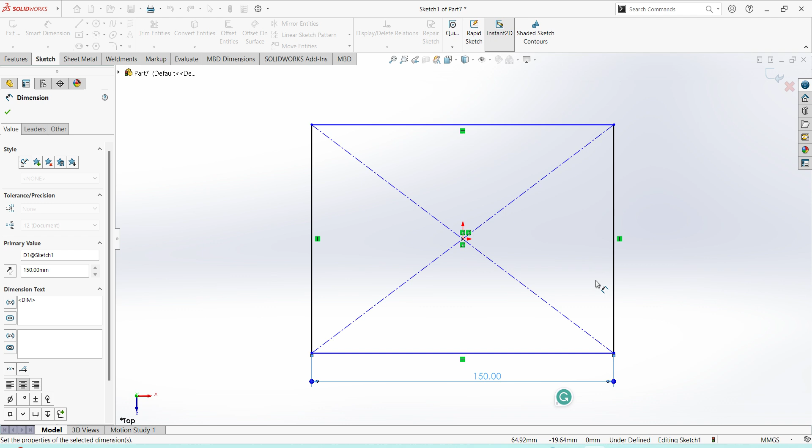Select extruded boss, select top plane, select center rectangle, give the dimension 150, this is 250, extruded up to 30 mm, click OK. So base is ready.

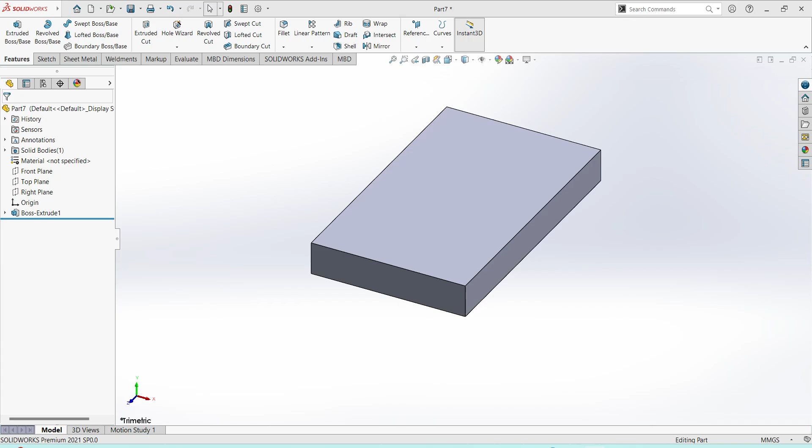Next there are 4 holes, diameter is 25 mm, pitch is 90 and 190, from the side 30 by 30. Select this surface, sketch, select circle, give the dimension 30, this is also 30, diameter is 25.

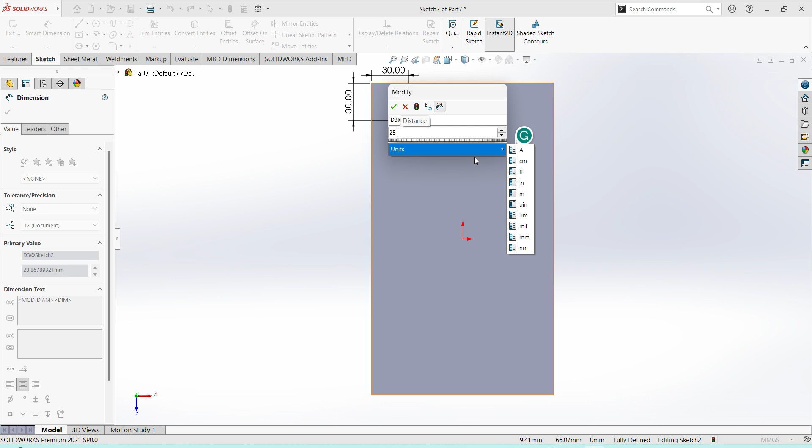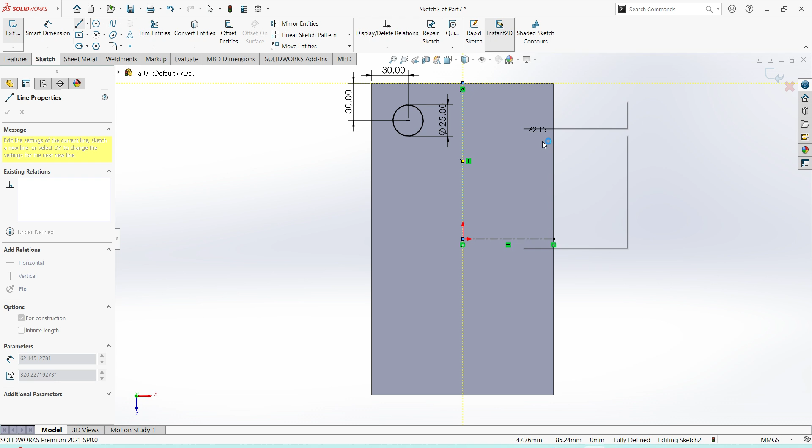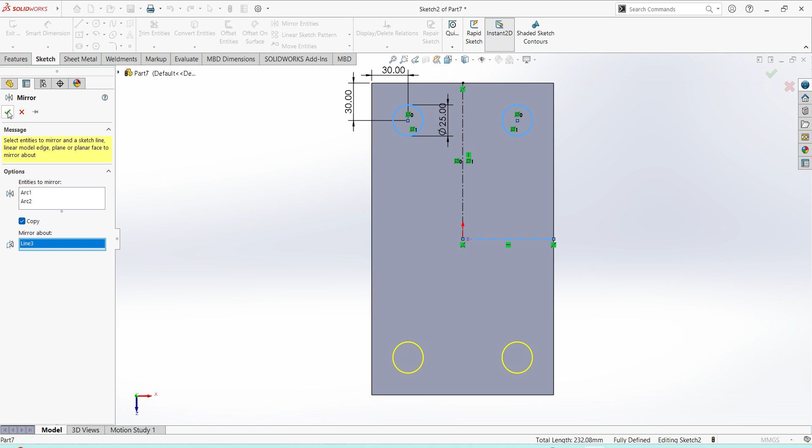Select here center line, select circle, select mirror, select mirror about center axis, click OK. Again select 2 circles, select mirror about center axis, click OK. Finish sketch, select extruded cut, select through all, click OK.

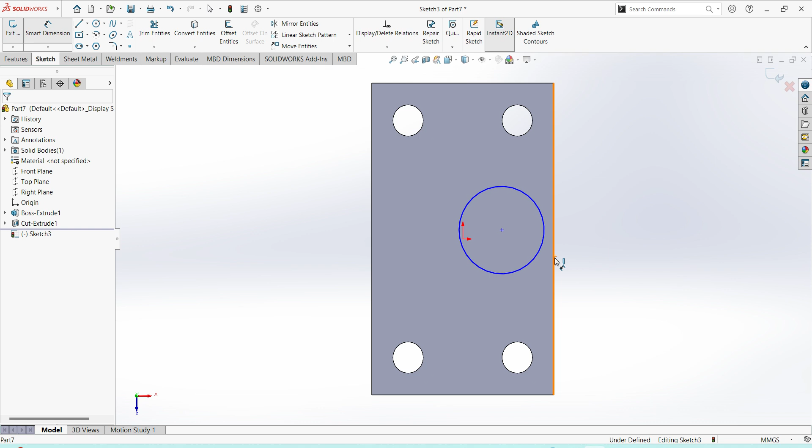Next there is one hole, 50 diameter, center of the object and 50 mm dimension. Select this surface, sketch, select circle, give the dimension 50, diameter also 50. Select the center point and origin point, select horizontal constraint, click OK, finish.

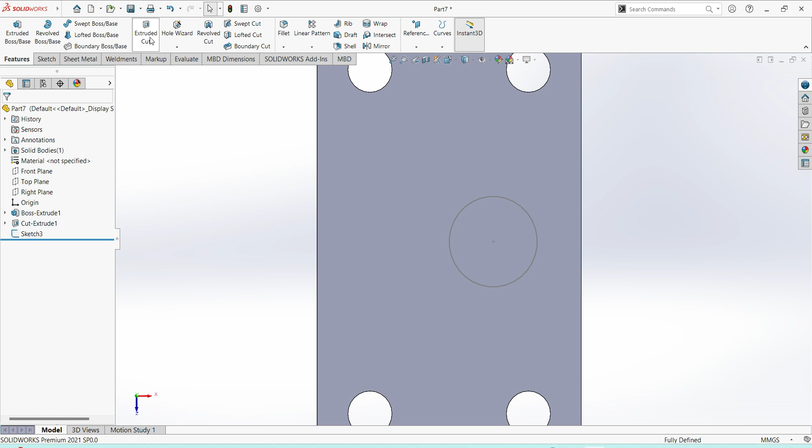Select here extruded cut, select here through all, click OK. So first part is ready. Save the part as bottom plate, save.

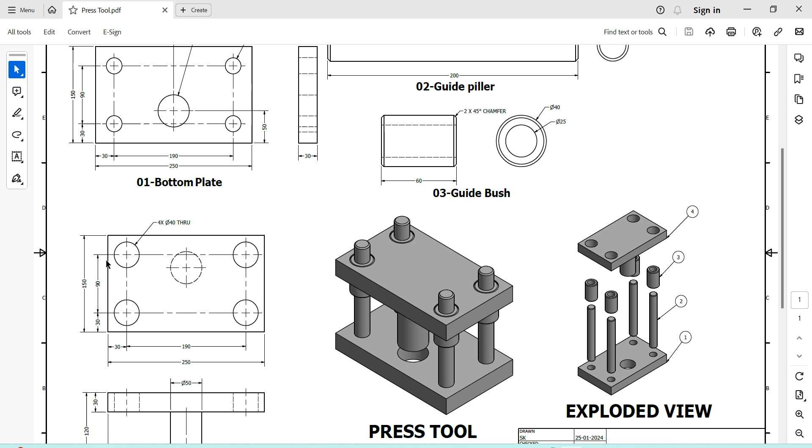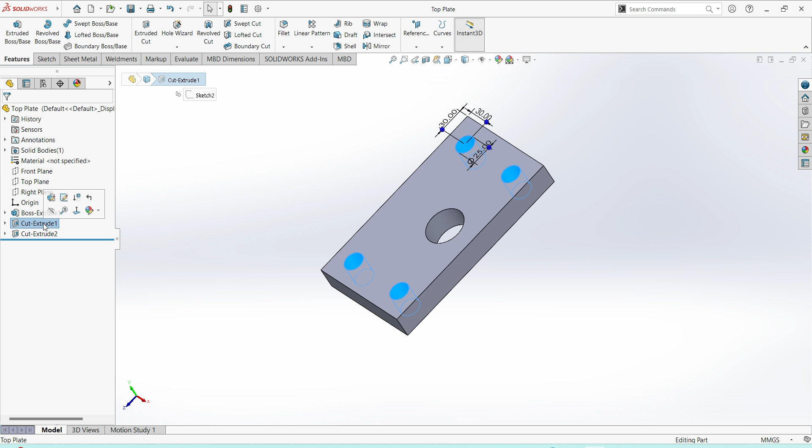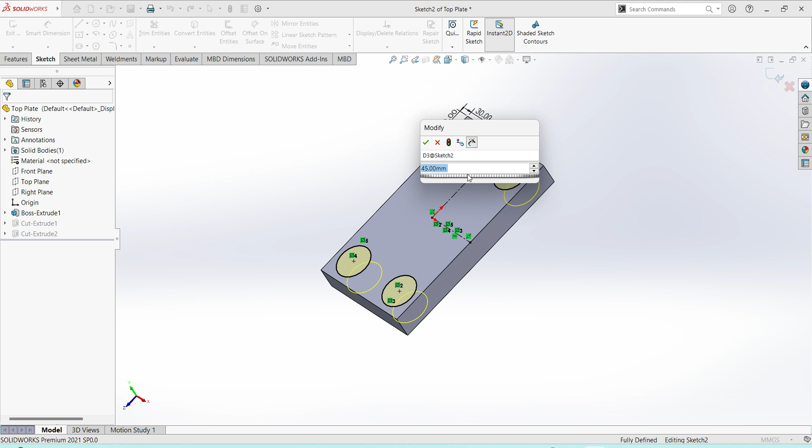Second part, you can see top plate also similar but hole diameters are different. For that go to file, save as top plate, save. Edit this sketch, give the diameter 45 mm, 40 mm. Click OK.

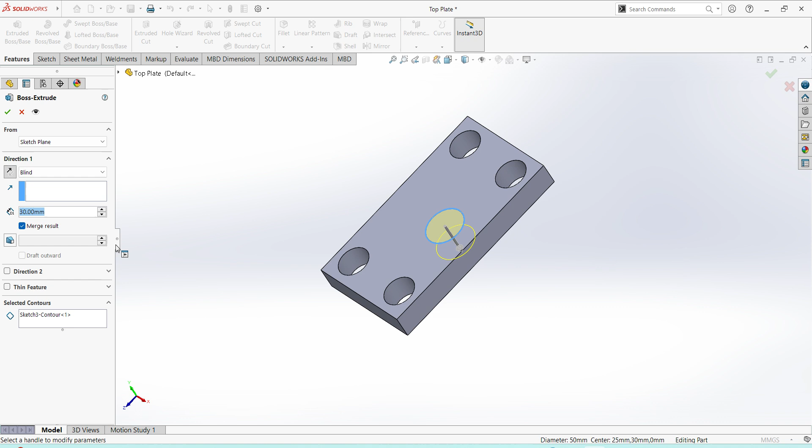Again select this cutout, delete this, select extruded boss, select sketch. So reverse the direction, we want 90 mm plus 30, 120 mm. Click OK. So second part also completed.

Next, guide pillar, diameter 25, length is 200 mm. Close this.

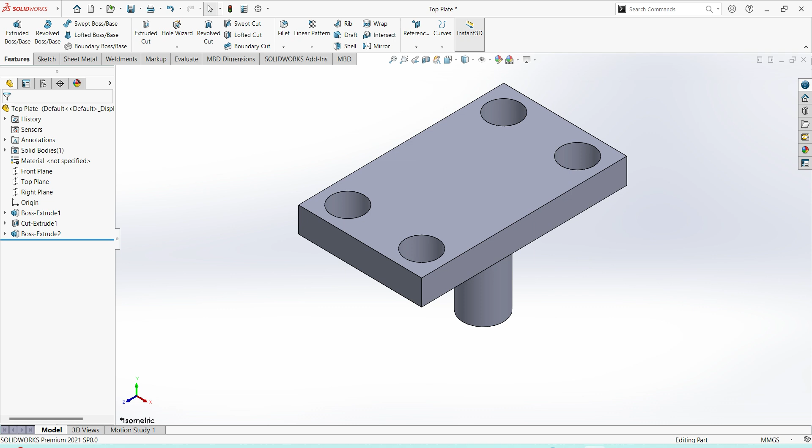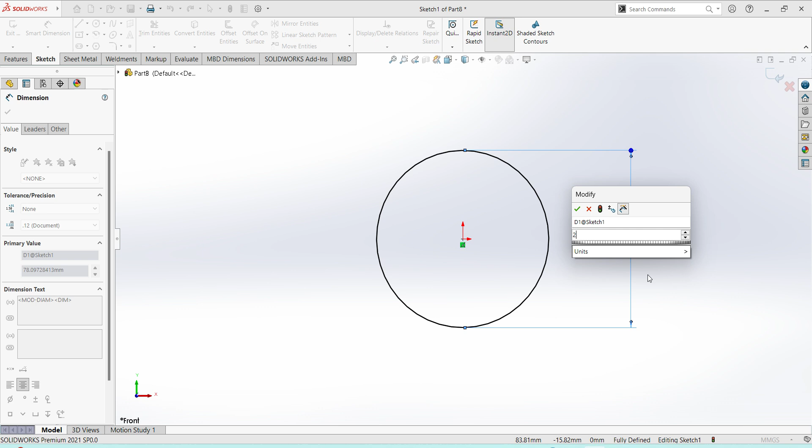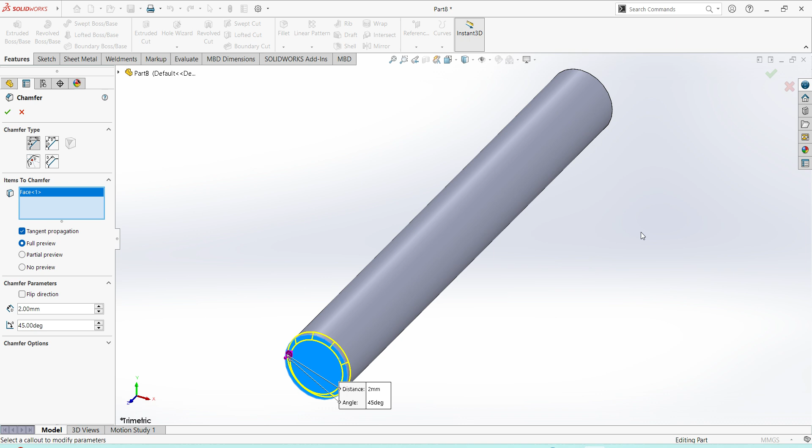Select extrude, select front plane, select here circle, diameter 25 mm. Click OK. Select mid plane, give the dimension 200 mm. And also select chamfer, give 2 mm both side. Click OK. You can see shaft is completed.

And other one, guide bush, outer diameter 40, inner diameter 25, length is 60 mm, 2 into 45 degree chamfer. Save as guide pillar. Close the part.

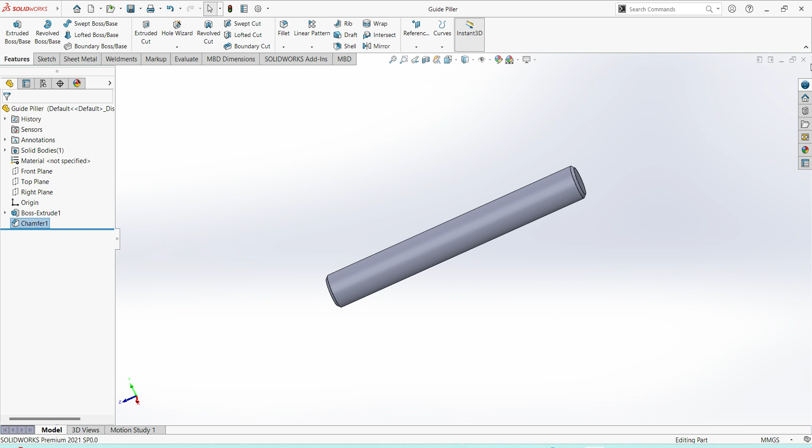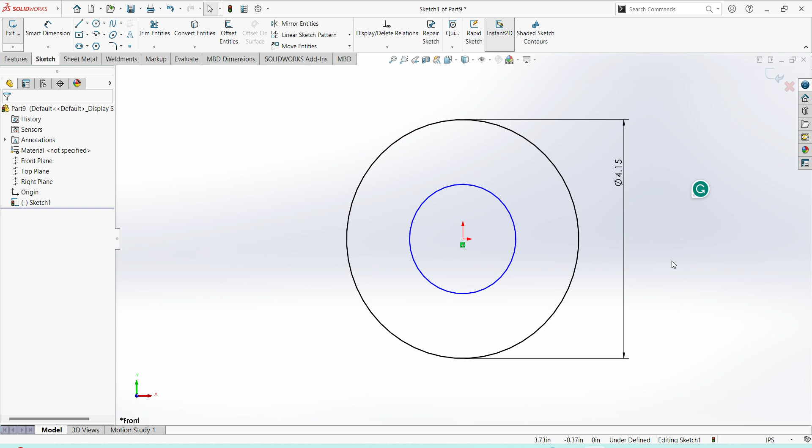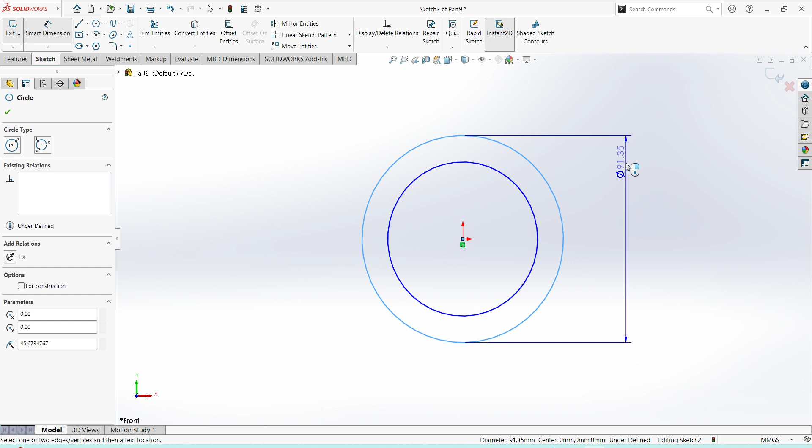Select extruded boss, select front plane, select here circle, give the dimension 40 mm, change here unit friends. Okay, select extruded boss, front plane, select circle, again select one more circle, give the dimension 40 mm, one more 25 mm.

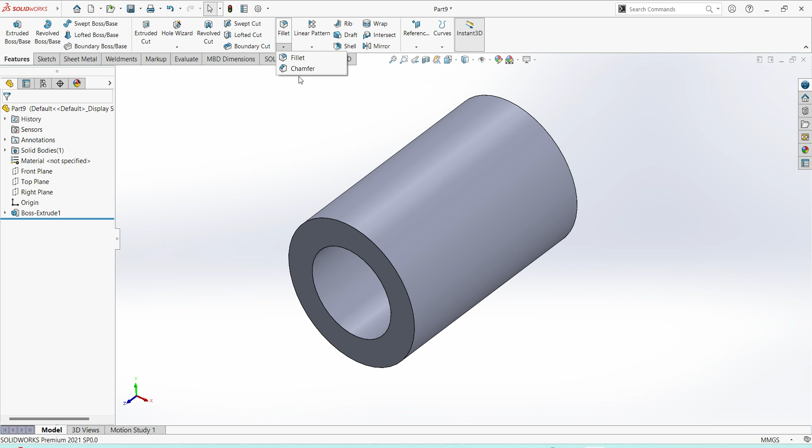Finish sketch. Here select mid plane, give the dimension 60 mm length, click OK. Select chamfer 2 mm, select outer edge only, click OK. Save the part, guide bush. So all the parts are completed.

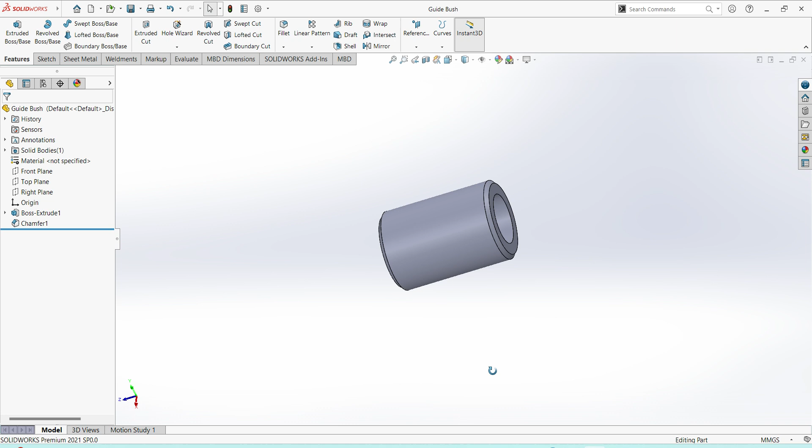Now I will start assembly. Control new, assembly, OK.

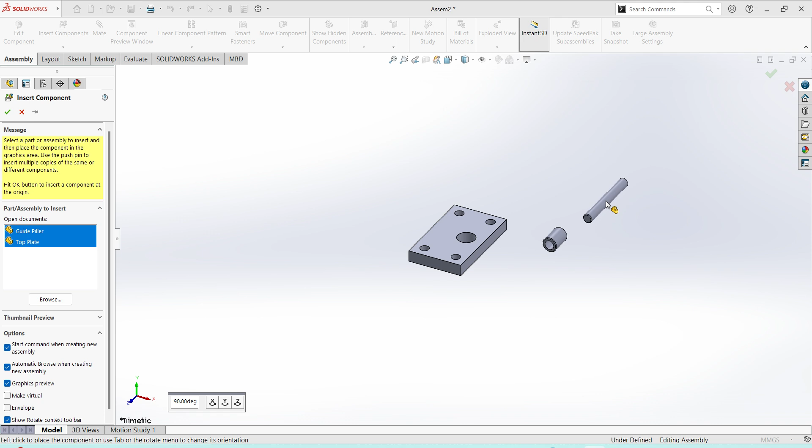Insert components: bottom plate, guide bush, guide pillar, top plate. So this part already fixed.

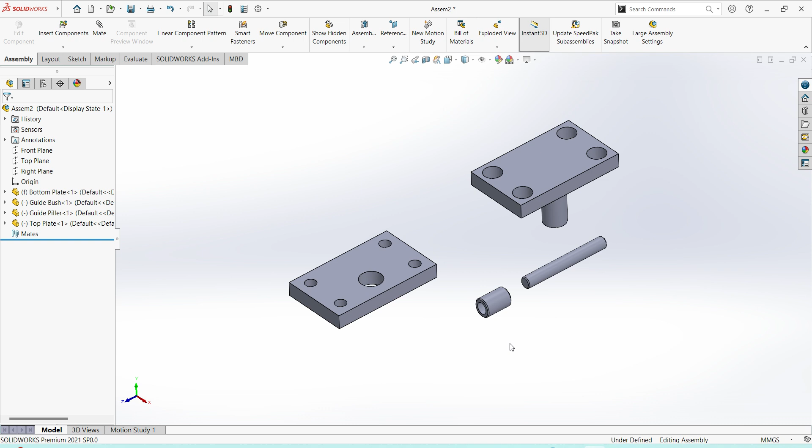Select mate, select this part and this part, concentric, OK. Select bottom surface and this, parallel, OK.

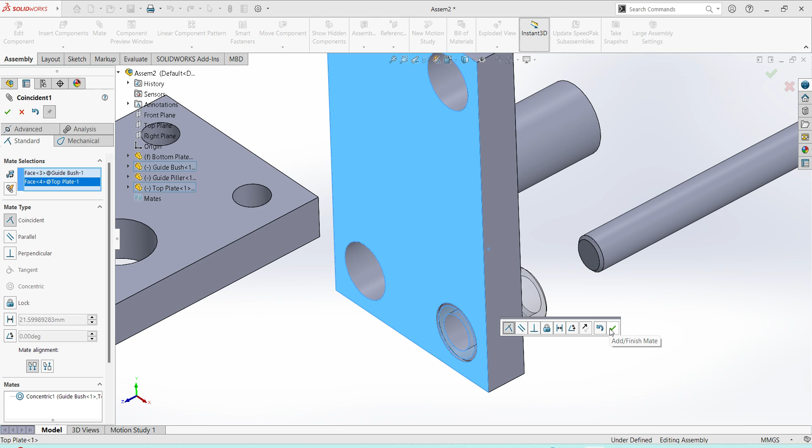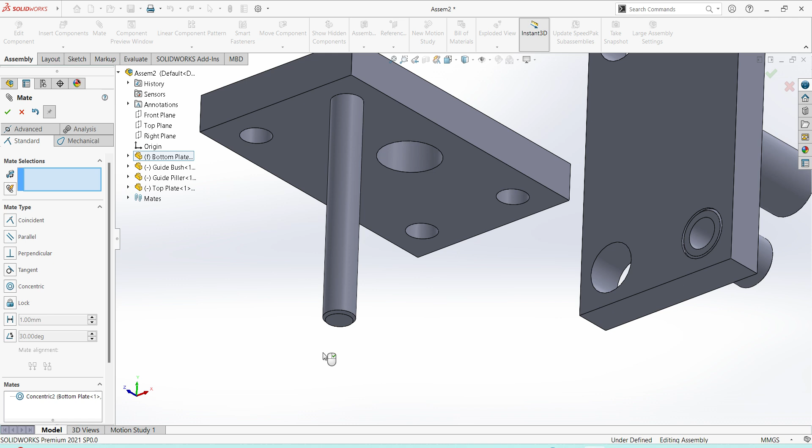Select this guide rod, mate, select guide rod, mate, bottom plate, concentric, click OK. Select bottom surface of the guide rod, select plate surface, coincident, OK.

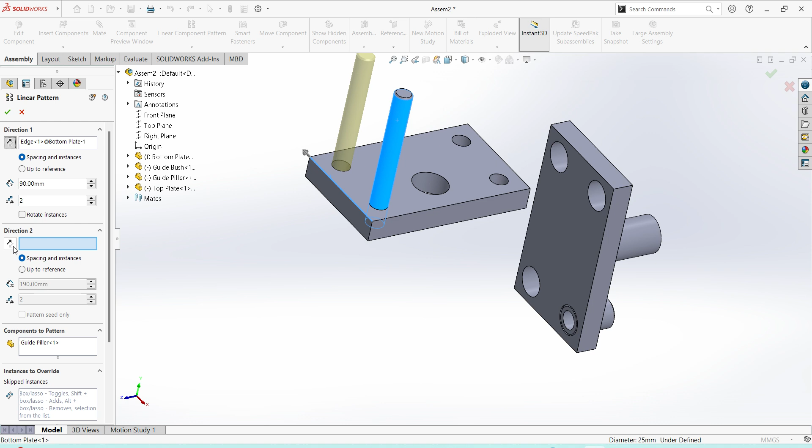Now here select linear pattern, select the direction, reverse the direction, select direction 2, reverse the direction, 90 mm, 190 mm, click OK.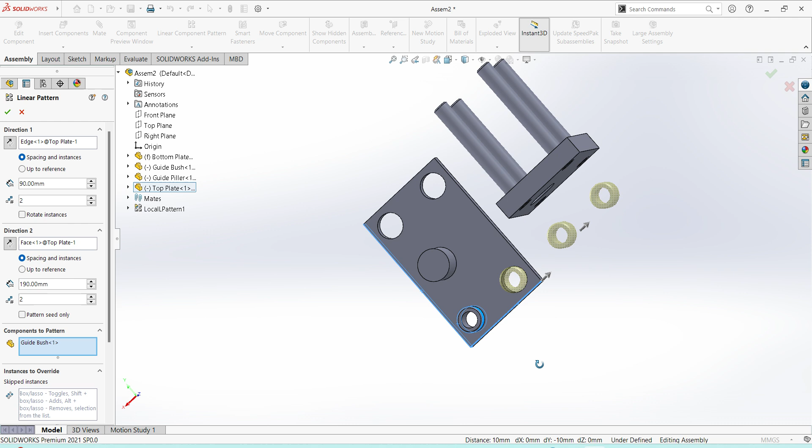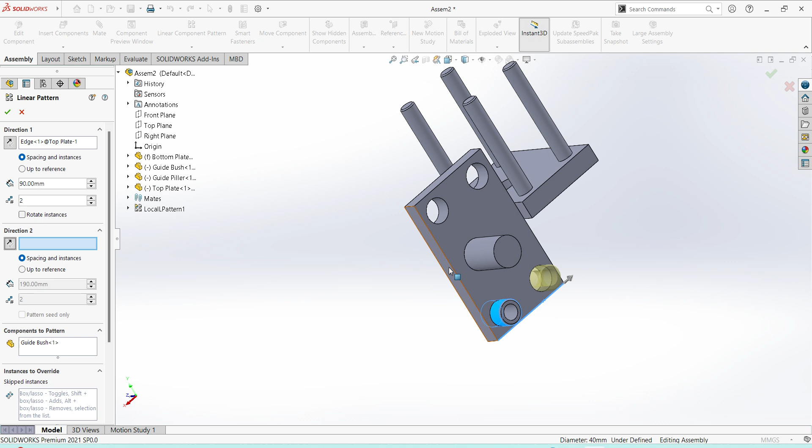Same, select this component, select linear pattern, select the direction, reverse the direction, direction 2, select the direction, select the component, select linear pattern, first one select the direction, reverse that, second one reverse the direction, click OK.

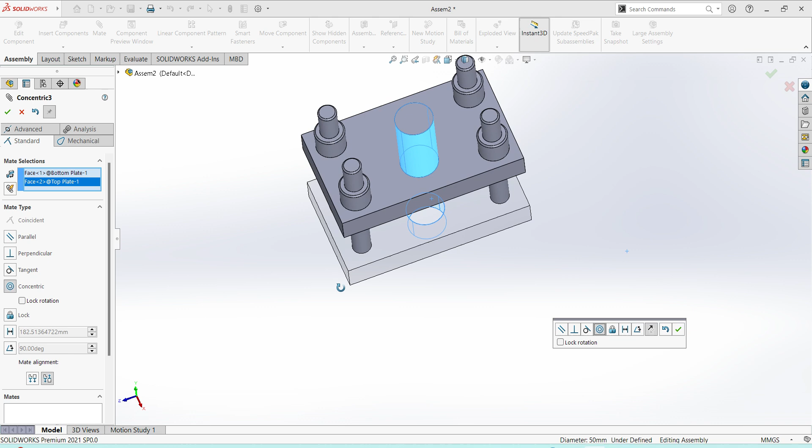Next select this surface and this surface, here reverse the direction, click OK.

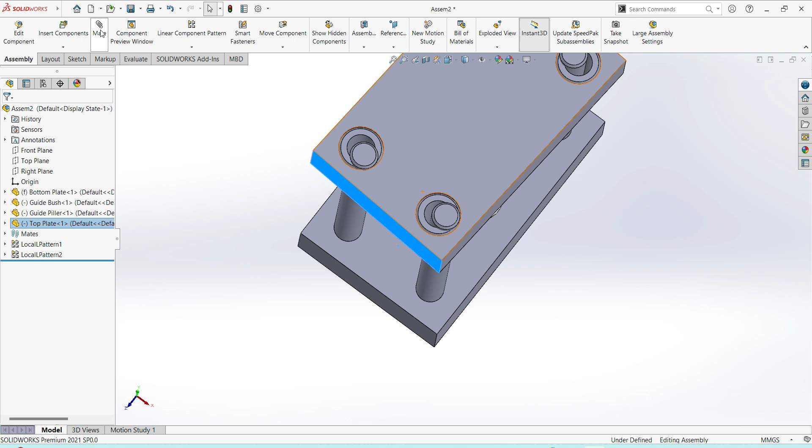Select mate, give these two parts, click OK. Again select these two, click OK.

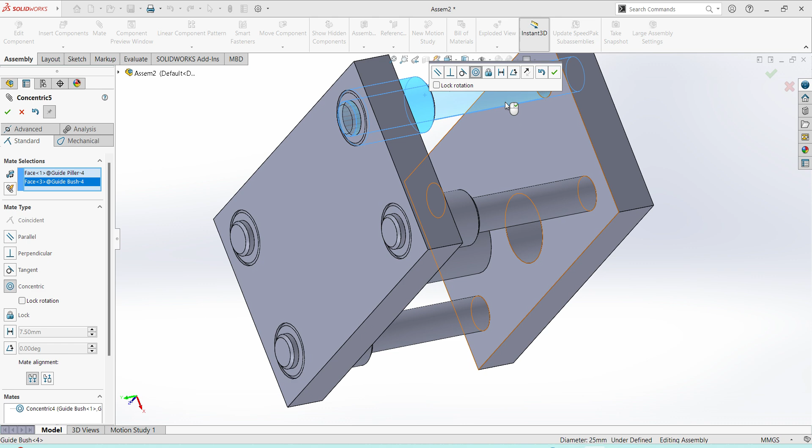So press tool is ready. This will work like this, punching, and also you can give mate here.

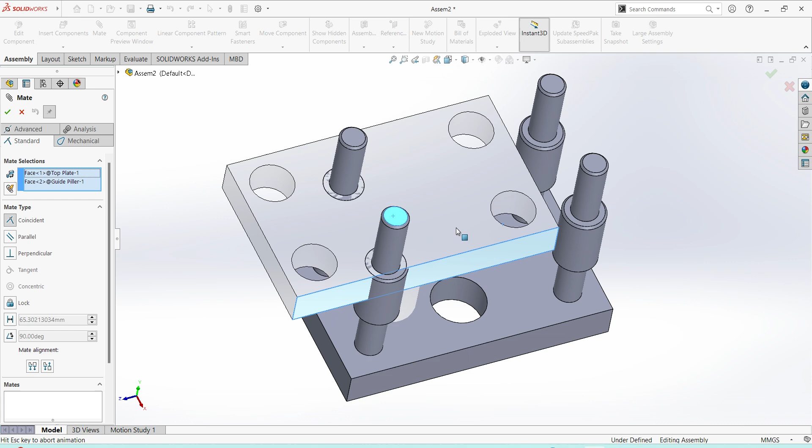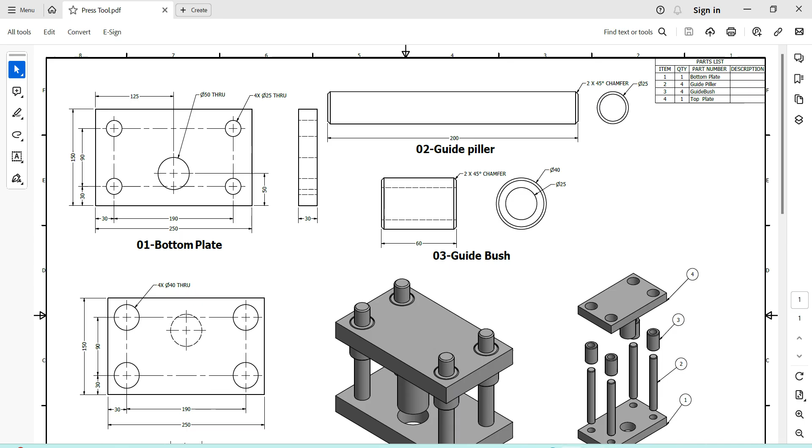Select this surface, this, give the dimension 30 mm, click OK. So you can compare, friends.

Save the assembly. Ctrl S.

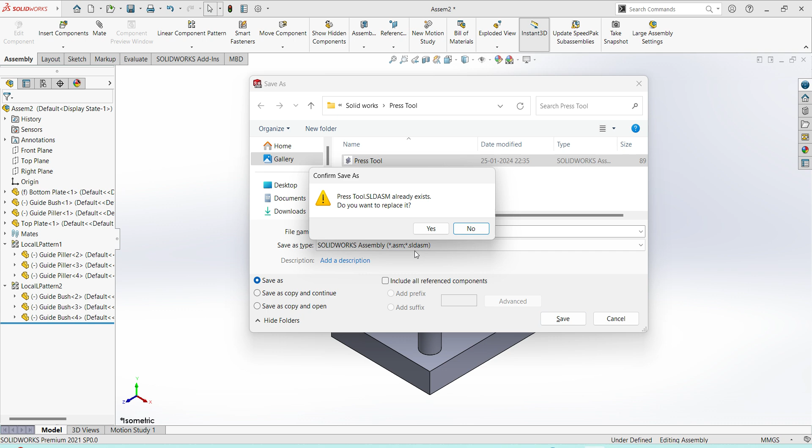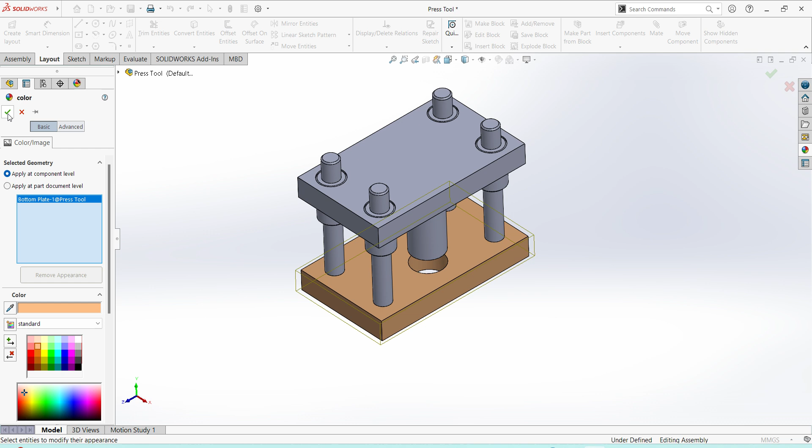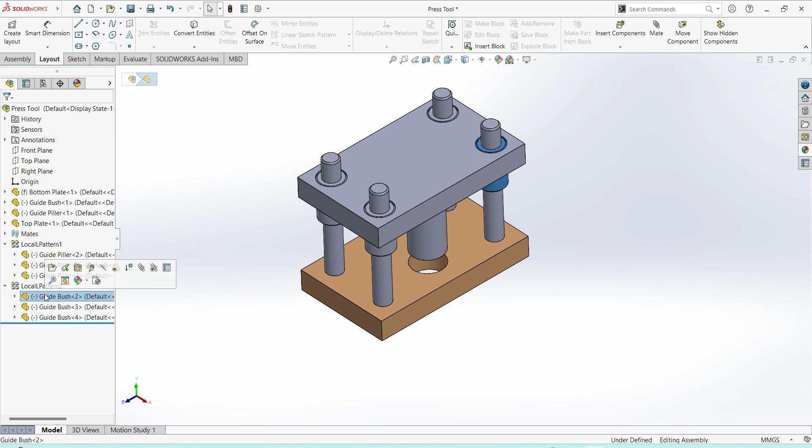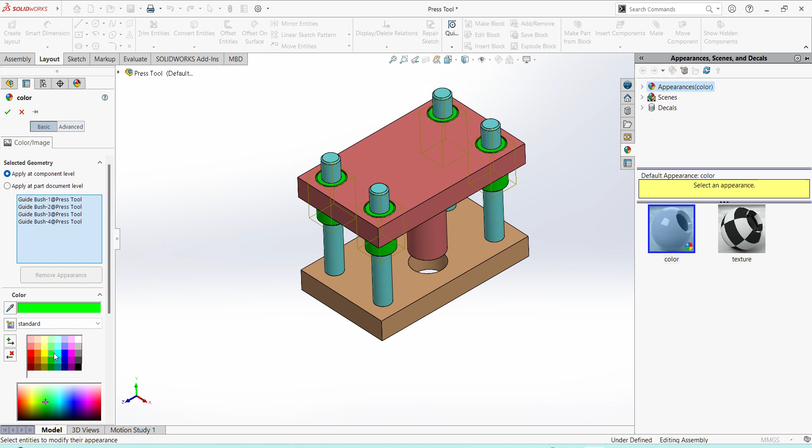And also you can assign some color here. Select the part, here assign some colors. Select top plate. Like this we can assign the colors, friends, for part identification.